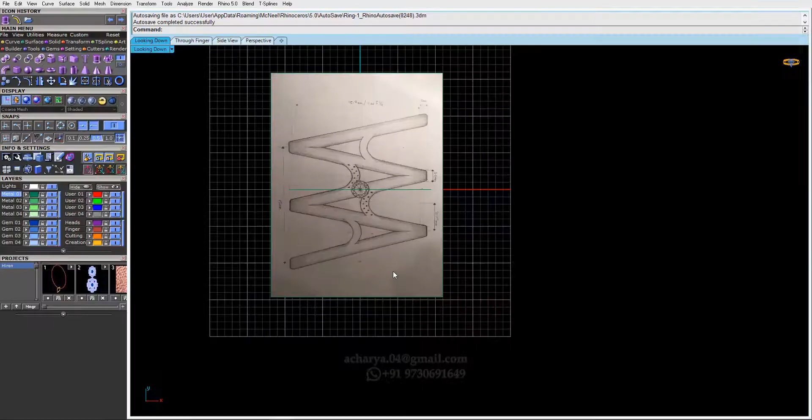Thank you, cheers. So today we're gonna make this ring. A client of mine sent me this image, and basically it's a ring, and he's given the information here, the size and the dimension. There are a few things which are not technically correct, so I informed him and he said, okay Arun, you can do it however you feel is good. So let's start this.

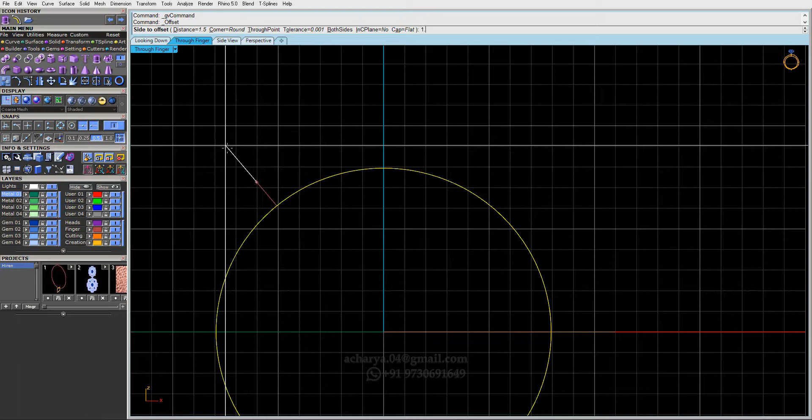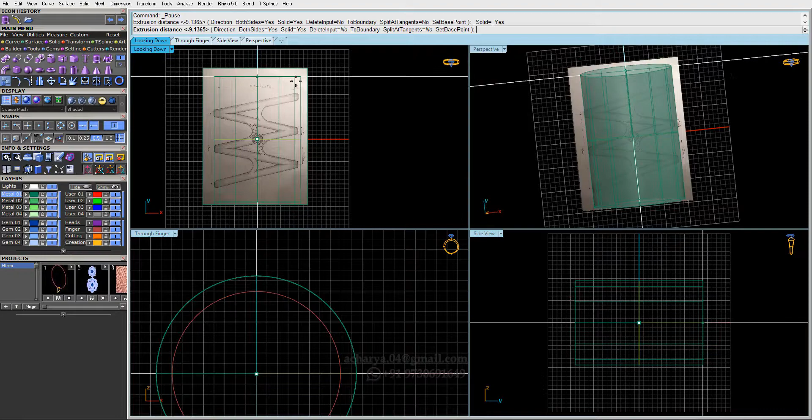I've taken the ring size here, and I'll do an offset. I'll make it around 1.5, just to make sure it's not too bulky, not too heavy. Before I extrude, I'll rebuild this curve, 12 by 3, that's a good amount. Then extrude. I'm just making it larger than the design right now, there's no dimension yet, and later we'll trace it down and see how we can fix this up.

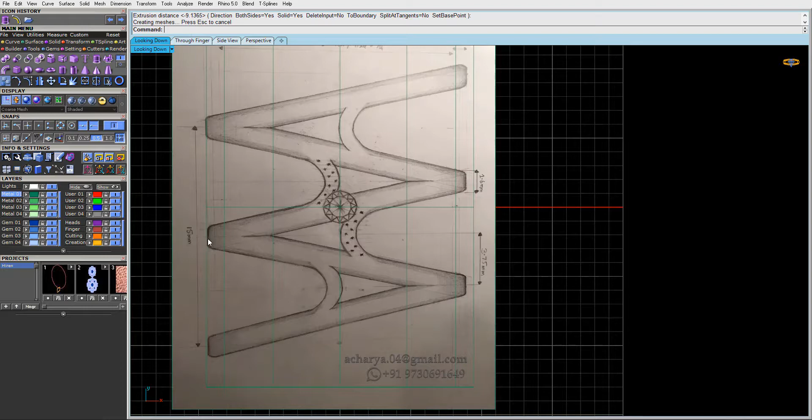So here the thickness is around 1.6, and from one end to the other end it's around 3.75 millimeters, as you can see here. And from the middle of this ring to the middle of this ring, it's around 15 millimeters.

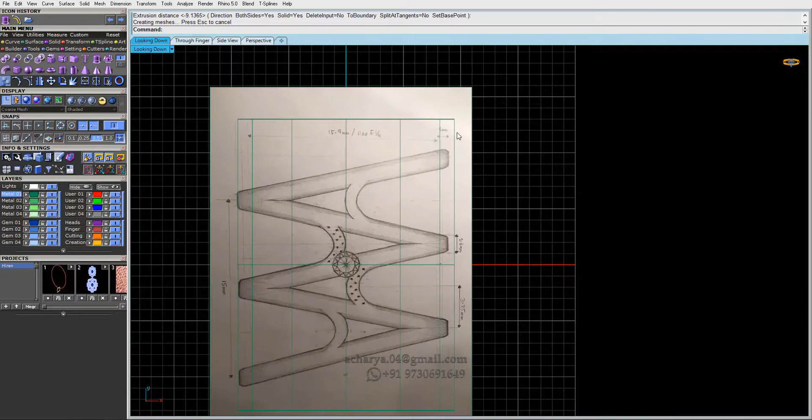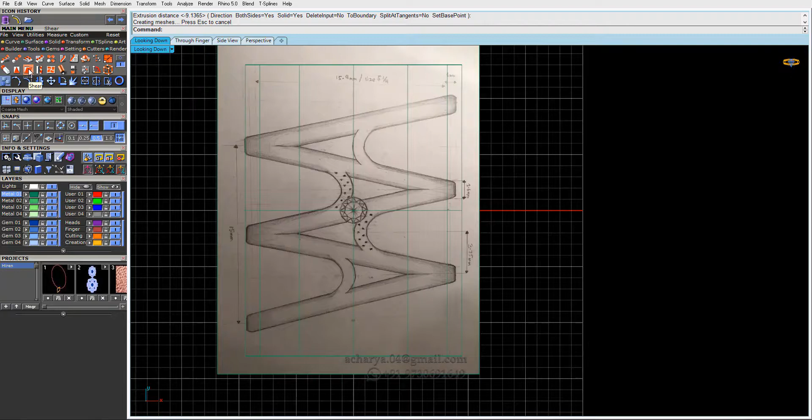So if you have something like this, it's actually very easy. We can just make one ring and then use the shear command, which is over here. Sometimes I have to look for the command. Here it is, shear, and you can shear this ring downside, then mirror it on the other side. I'll show you the easiest way, and then I'll show you the other way.

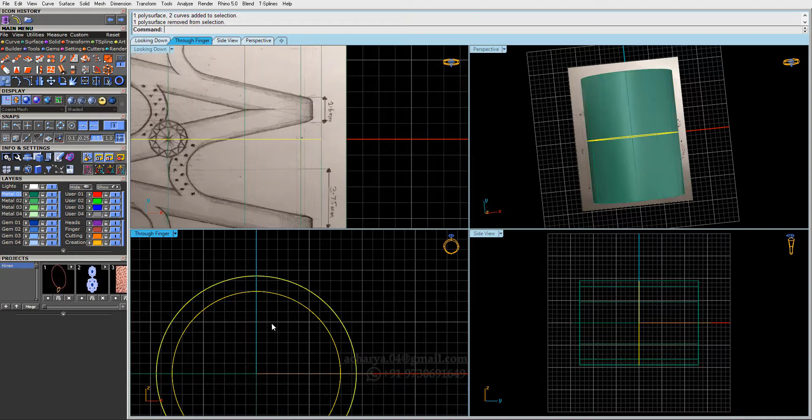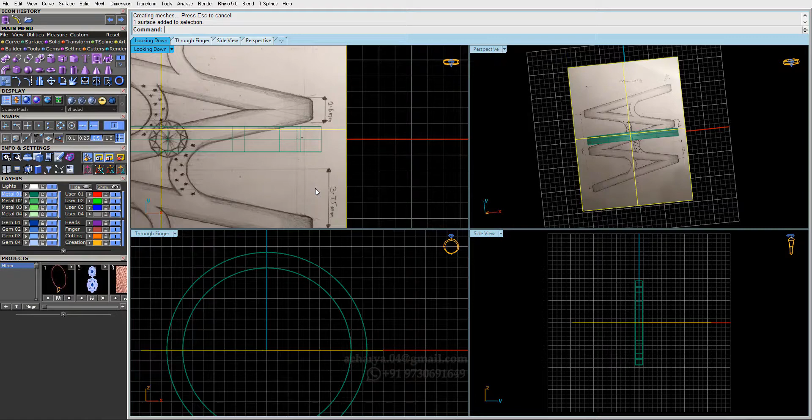It says 1.6, so what I'll do here is, okay, I just deleted the poly surface, I don't need them because I changed my mind. I'm gonna do it another way. I'm doing an extrude here, 1.6 divided by 2, and the reason I did this by 2 is because the extrusion was on both sides. I use half the value, and I'm gonna lock this surface.

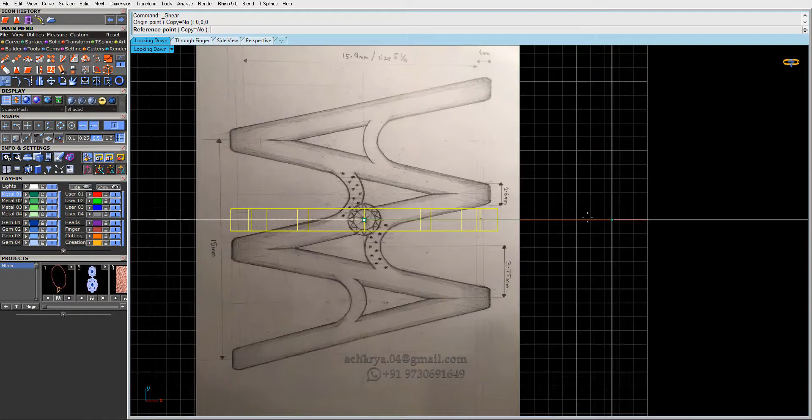If you guys don't know how I got this design on my screen, you have to follow my day 1 tutorial. So lock this out, Control L to lock it, and okay, this is the poly surface, let's go into shear. Select this out, this is the one. F4, use the ortho, press shift, and there you go. This is the first shank.

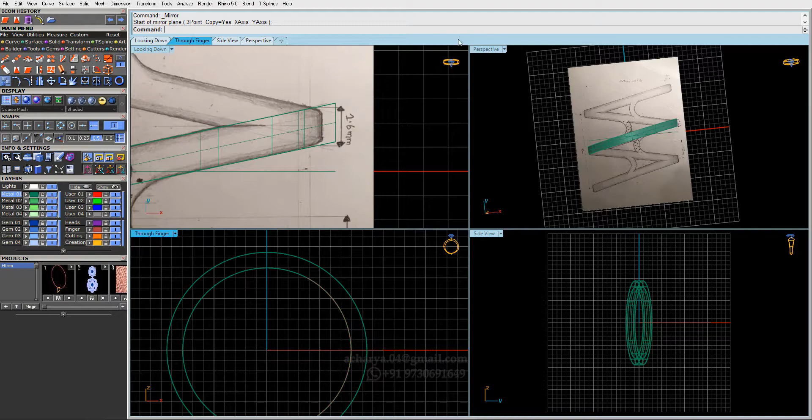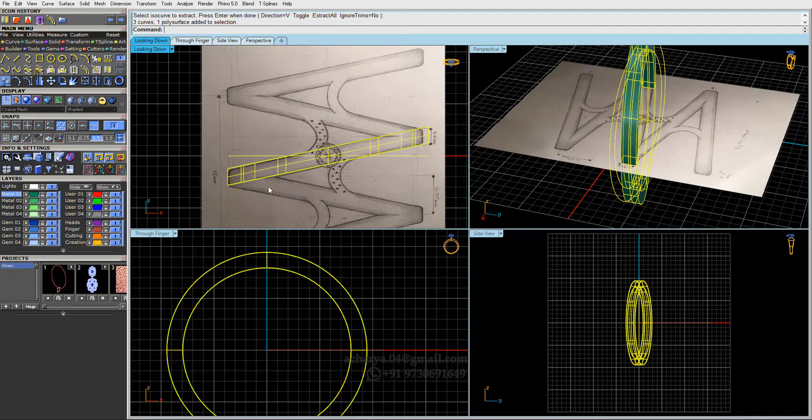On the other side I'm going to use the mirror, and for that I need something to hold, which I don't have right now. So I can extract a curve here, extract a curve, and that should be quad and toggle. Here it is. Now I have a curve, and I can hold down to the mid and just mirror this on the other side. So mirror, here's my mid, switch it on and everything goes off, and that's it.

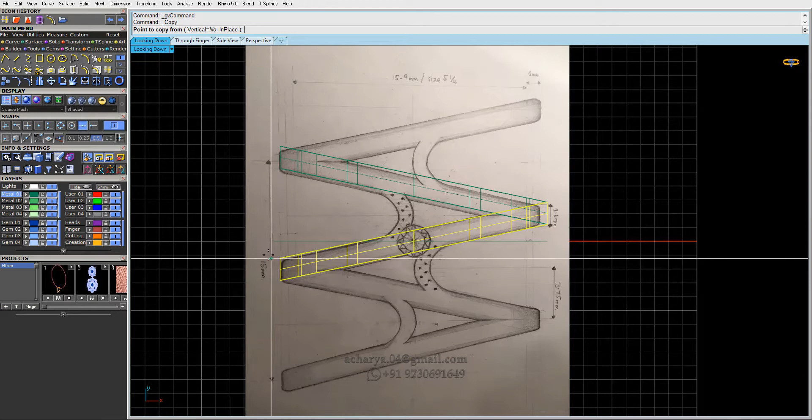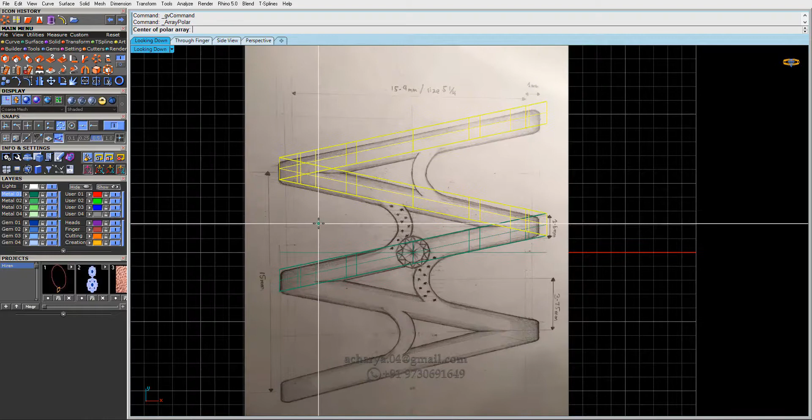I'll do the same for this one to be on the other side, or you can just use the copy option. You'll use the quad, and from here I'll copy, but make sure the project is on. And that's it, this ring was so easy. Now I'm gonna do an array polar on the other side, so F4, number of copies is 2. That's it. So the only thing remaining right now is this design, this metal over here.

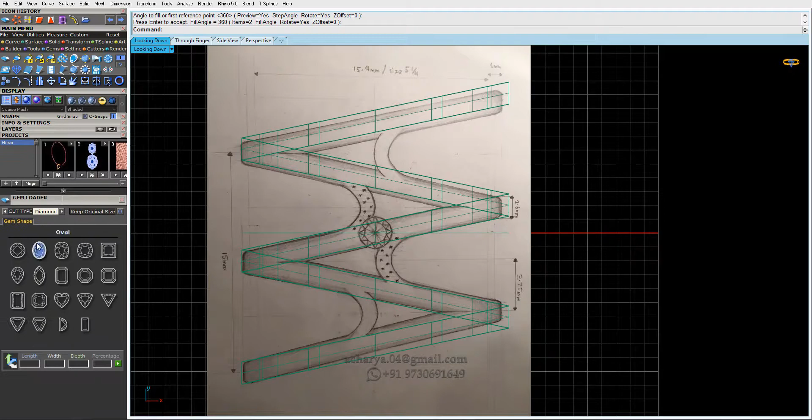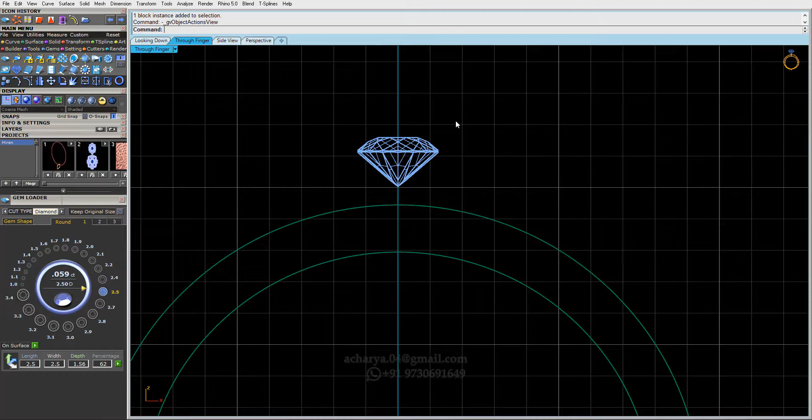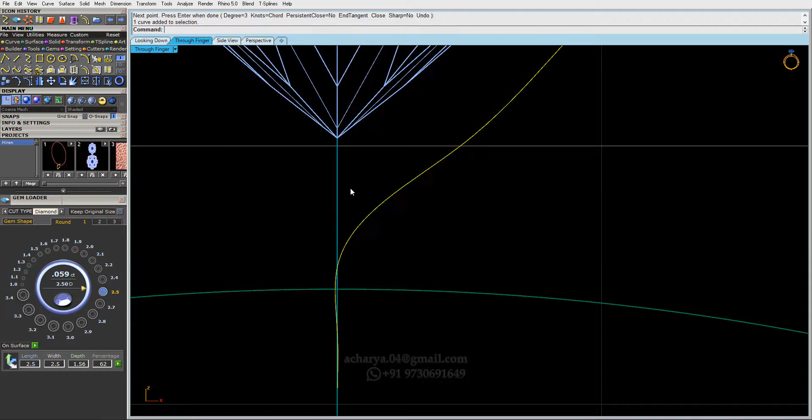Okay, and then we can see which diamond is sitting over here. Let's say I don't have any diamond information, so let's see what suits best here. 2.5 looks good to me, and I'll just raise it up. You can do a head builder here, or I prefer, for this tiny stone, I would just make it by curve, so just draw a curve with curve interpolate, and undo, and it goes down. Let's fix this. Usually you should have a library of all these small things, so you don't really have to work on it each time.

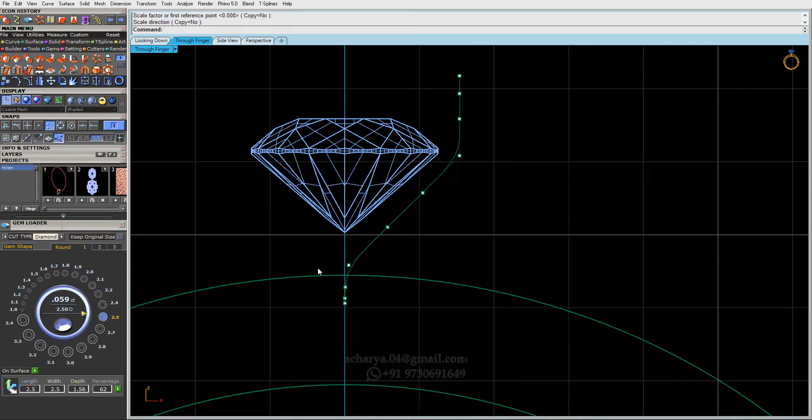Switch on the near option and use the ortho here, and I'll do 0.0001 just to make it flat. I'll do the same thing here and the same thing here as well. So what I've done here, as you can see, they are going straight now.

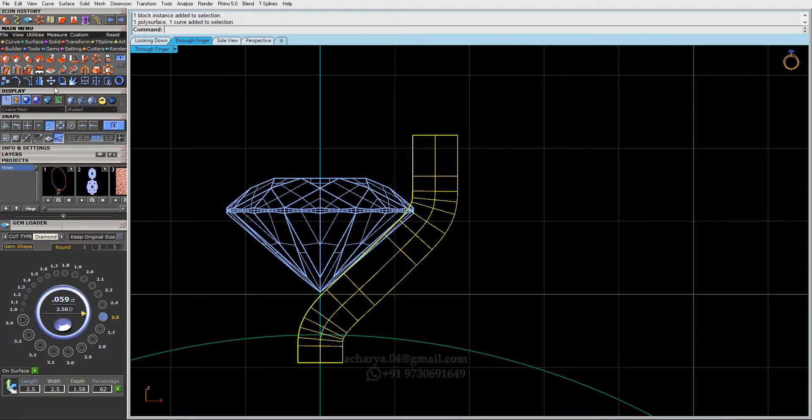Like from here it's straight, and then it goes straight here and straight over here. All right, so pipe command, make it around 0.6, that looks good, and just bring it down a little bit, yes. And I'll do an array polar here. That's it, it's ready.

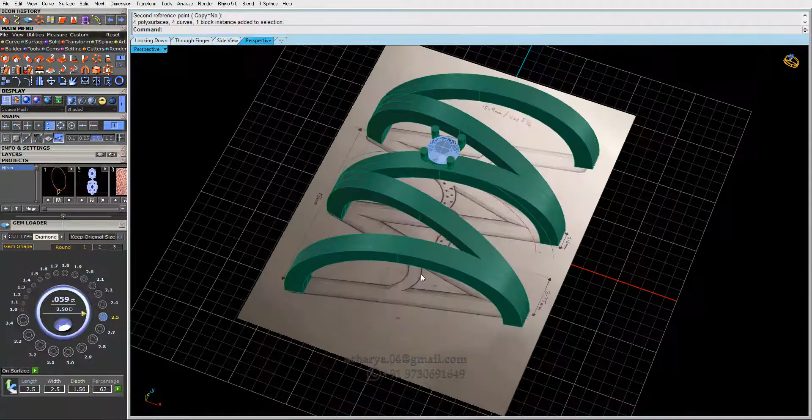And yep. And what else, yes, this one, still have to do this. So now what I'm gonna do is I'm gonna use the curve and extrude this, and here I'll just draw this line, this one over here.

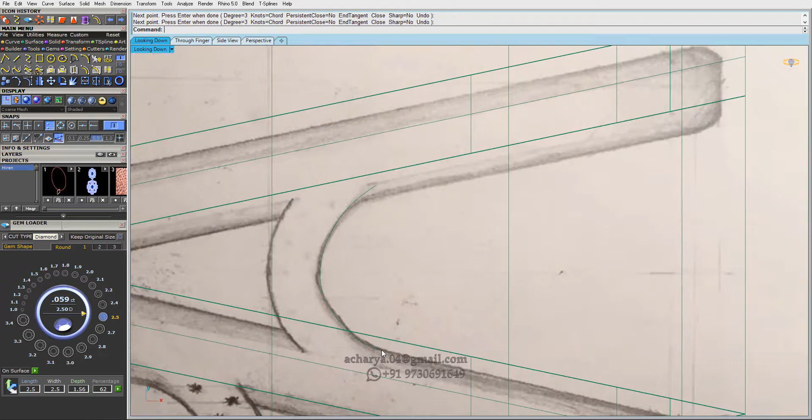As you can see, this is not matching to the design, but obviously we have to be sure that we are doing it in the right way. So the thing I realized, I didn't measure this shank, from here to here. So let's do this now.

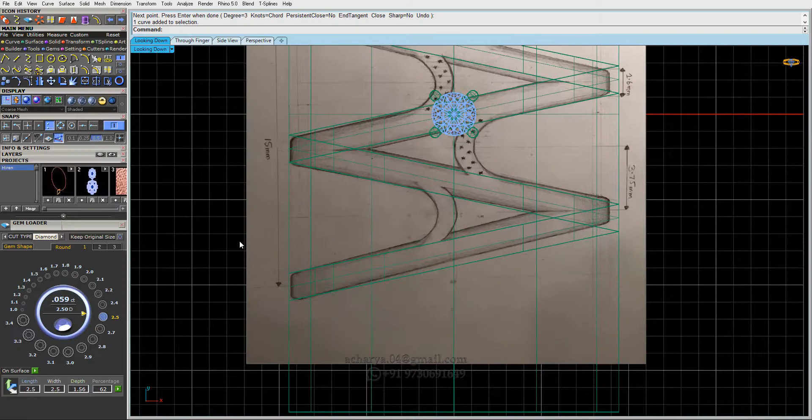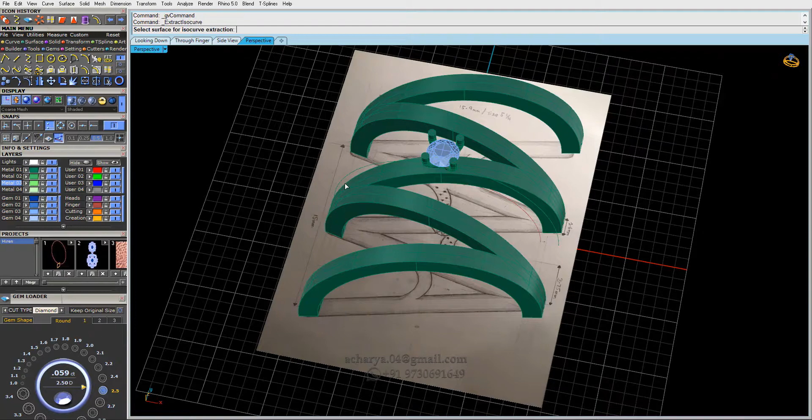So for that I need to extract the curve for the middle line, but before it gets complicated, I'll hide this, and let's change the layer color over here. So interpolate, click, extract iso curve, click, toggle, intersection on.

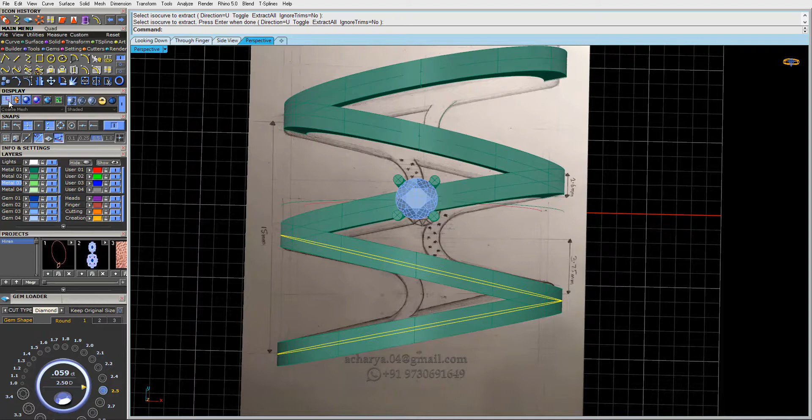I'll use on this, and I'll do the same for this. Okay, same, looks good. And then I can copy this on the other side. So quad is on, and let's copy this. Okay, so we have a curve exactly in the middle, and let's measure this.

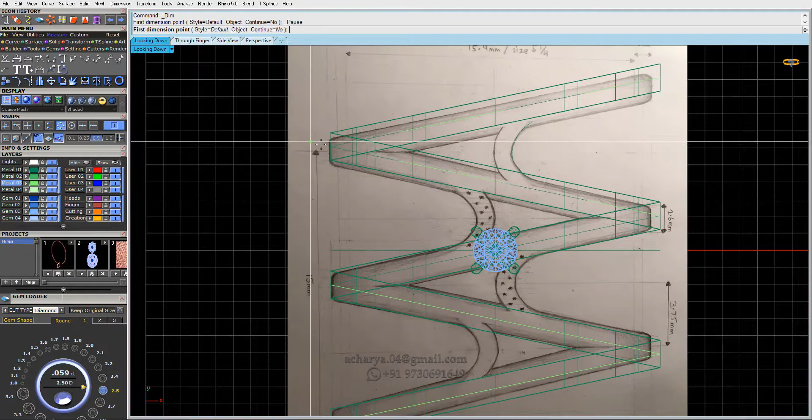So from the mid of this quad over here. Okay, where is it? Hello. All right, I don't know why there's no point here. I should be able to get one. Yeah, there is one. Lock it.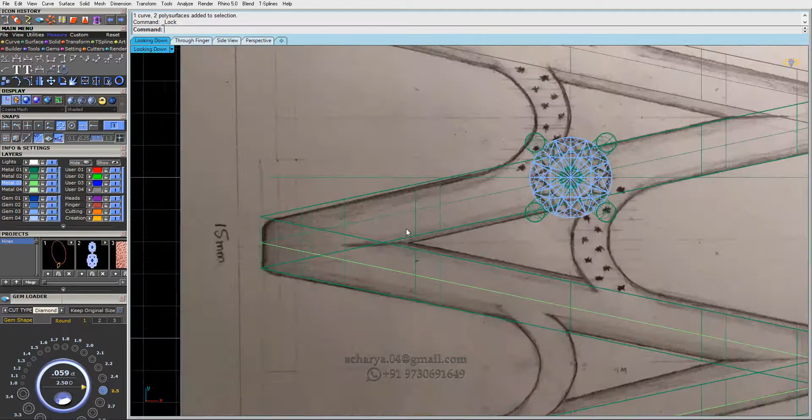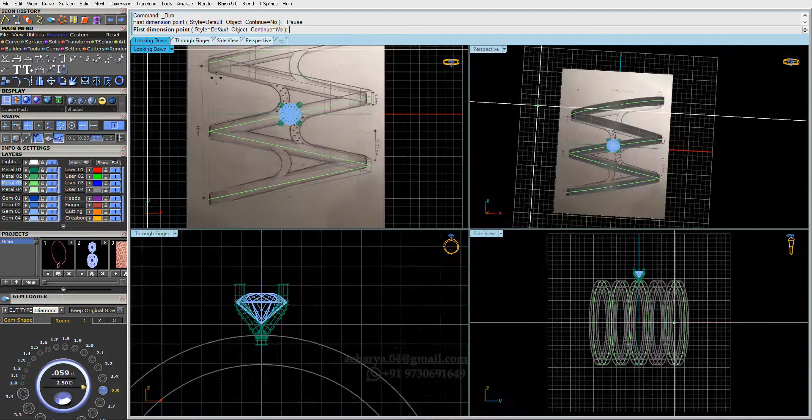Lock this as well. And yep, let's measure this again. Okay, so there's nothing coming out. Let's try with Intersect. I don't know why it happens like this.

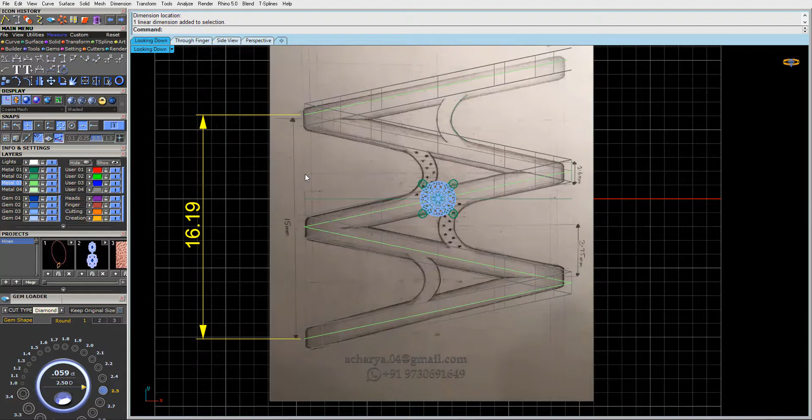It's too bad. Yeah, here, quad to quad. Okay, so it's bigger than what we should have done it. So how do we get this right?

Okay, well, technically speaking, if this is 15 millimeter and you divide this in half, so it should be if you divide 15 by half is 7.5, and if you divide 7.5 by 2, how much it should be? Something around 3. Oh yeah, that's what written over here.

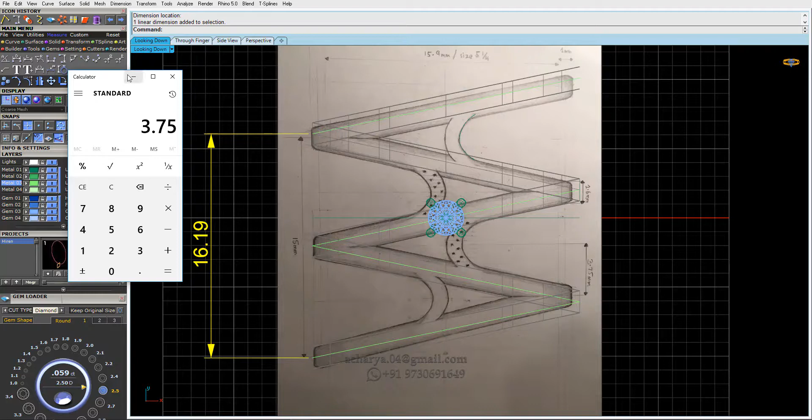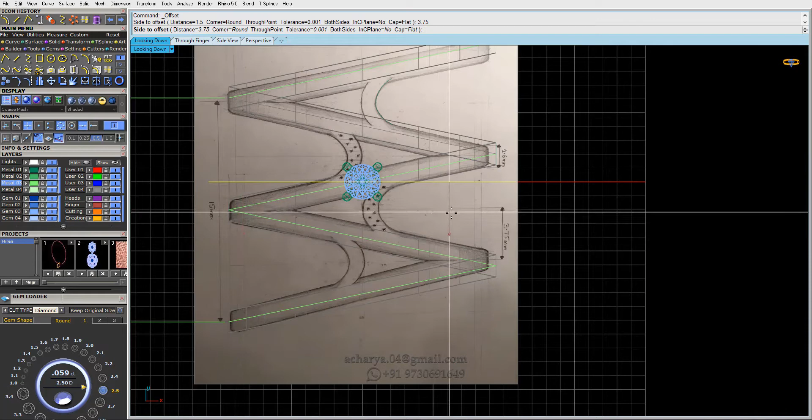So all right, so what we'll do here is I'll draw a line from the center, both sides, and I'll make an offset on the other side, 3.75, which should come all right anywhere. So just click here. So this is the length we are looking for.

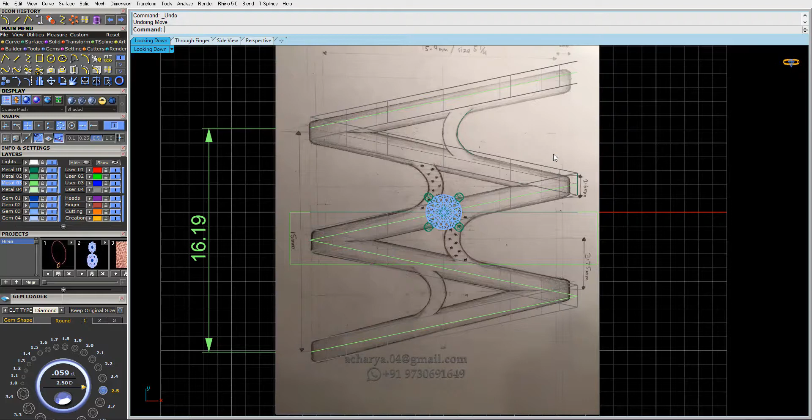So what I will do, I will move this from here. Okay, I'll keep this in the same position, and okay, and what I will do here is I will just make it double. All right. Yep.

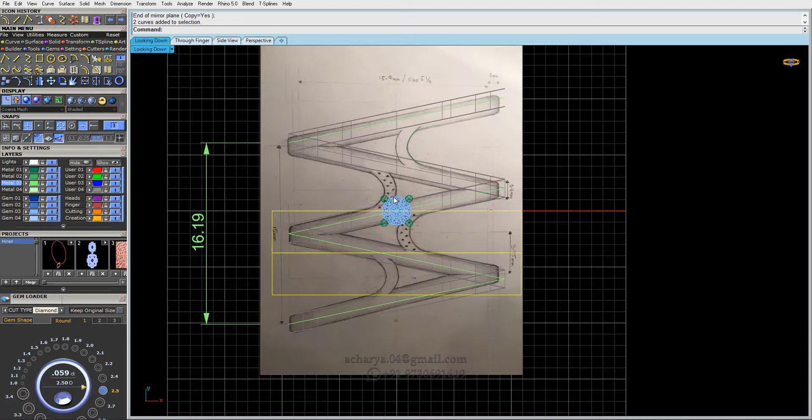So the middle of this is here, and this is where it should have ended. Okay, this curve over here. So we did everything good, but it was just that because of the offset here, because they had 1 millimeter, and that's why it's showing up here instead of here. So not a big deal.

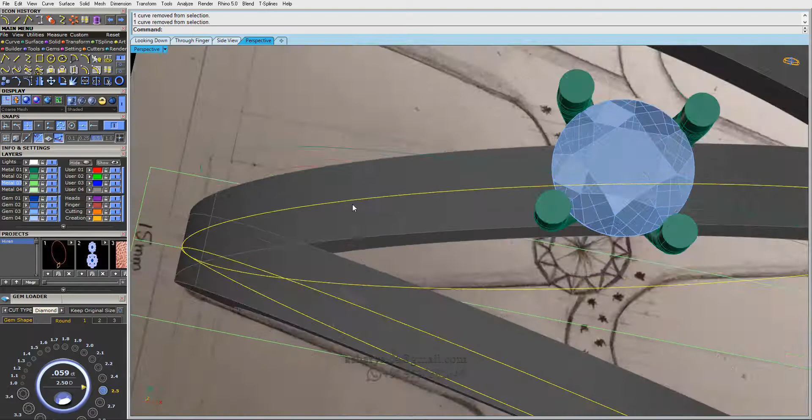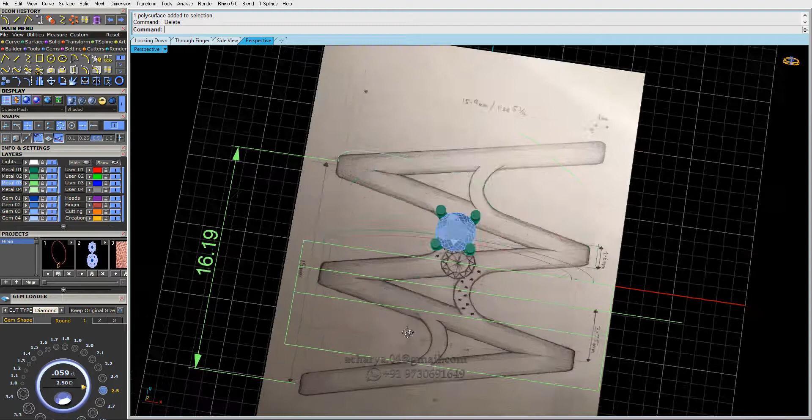What we can do here is, okay, I can do this completely new without losing my diamonds. All right, so delete this. Yes, are you sure, Arun? Yes, delete this. Okay, unlock everything, and delete. This is so simple, I should not make it complicated.

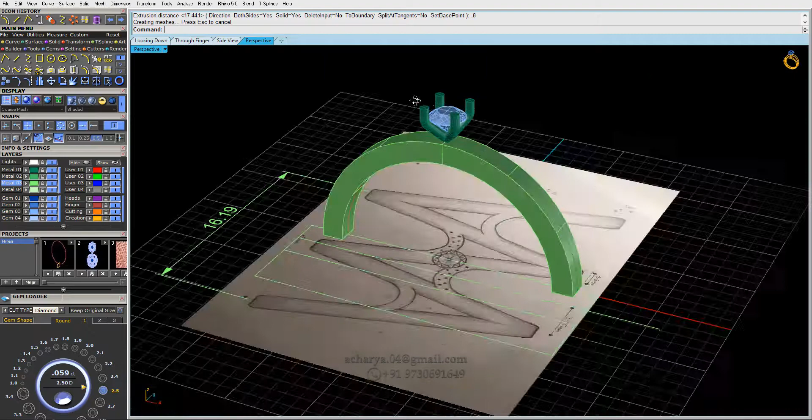All right, so extrude again. Extrusion was 1.6, so it's 0.8 if it's on both sides. 0.8, and we'll select the poly surface and the outside curve, which is this one. Okay, and this time we're gonna use the shear option.

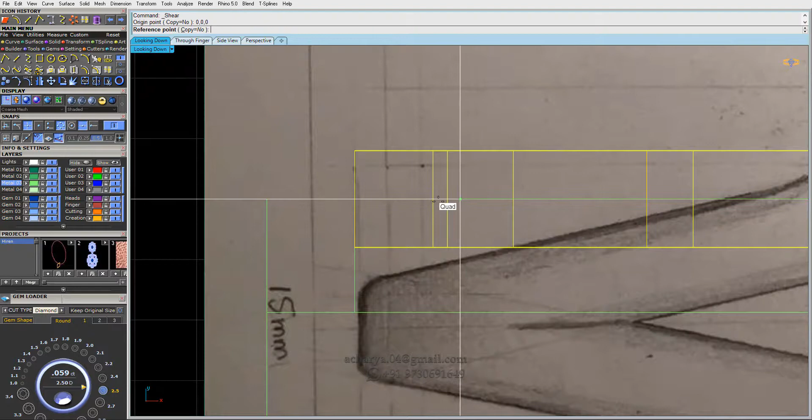Okay, yes, I got you this time. Click here on the quad and then move it to the mid. Okay, all right, so this is the mid here, but this has to be on the curve. So just draw a curve from quad to intersect, and then when you do a shear from F4, make sure the project is on the intersection and intersection.

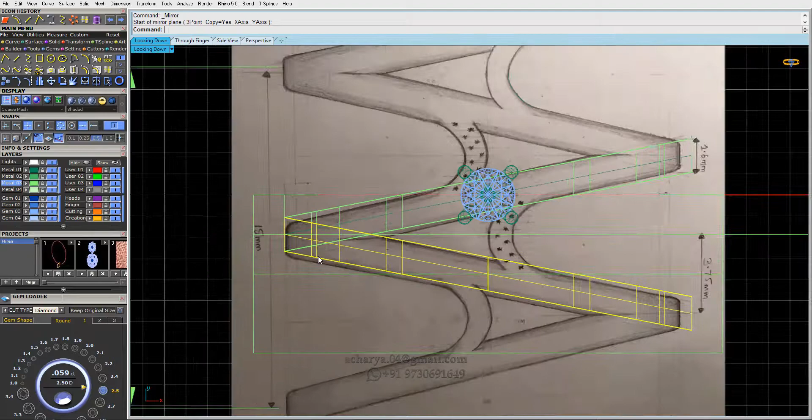That's it. Perfect. Mirror on the other side. This is another way, like you can still use this option as well. And mirror on the other side using the quad. Hello quad. Okay, it's not working. I don't know why. It should work, but sometimes it doesn't, so it's fine.

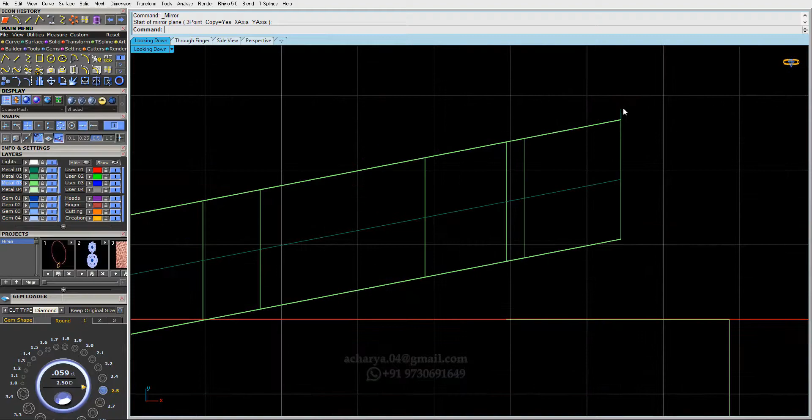Maybe it could be the reason that I have a surface over here, so I just hide it, and I'll try to mirror it again. You need to know the answer. Why is it not working? Okay, it's still not working. That's fine. And I don't know what it is.

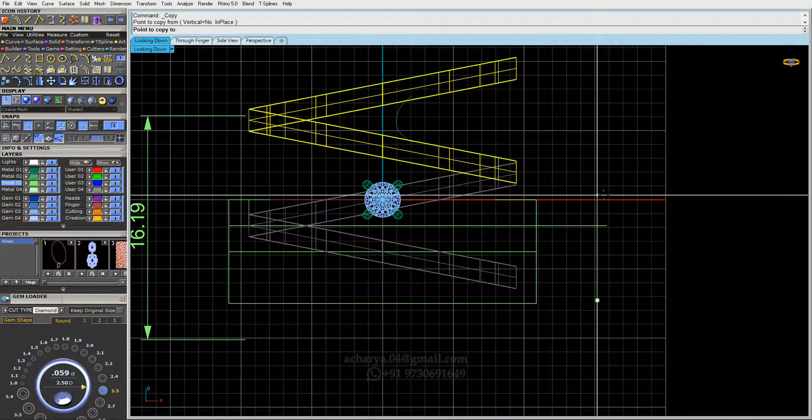Select this. Oh, what happened? Okay. Delete this. Select this as well. And let's do mirror, mirror, mirror. Oh god, they're not helping me. That's so bad. But because we have the number, let's do copy 15 millimeter.

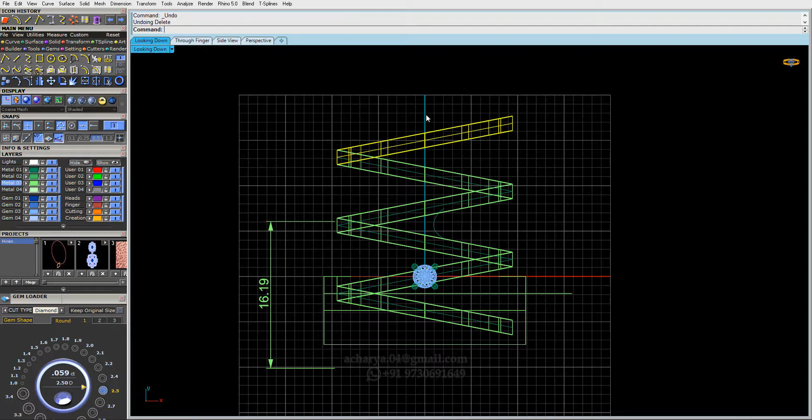And whoa, whoa, whoa. 7.5. Yes, it's helping. That's good. And 15. Perfect. So any one of this would be extra, because I don't have my image. So let's bring it back. Okay, this has to be here, so let's delete these two. We don't need them. And one has to be over here, and that I can do array polar.

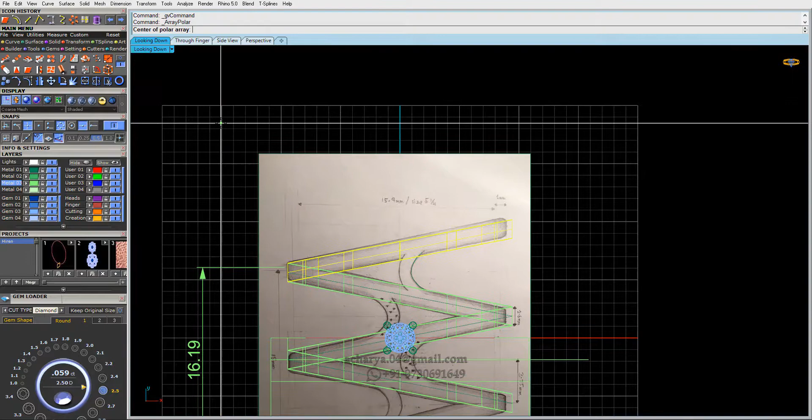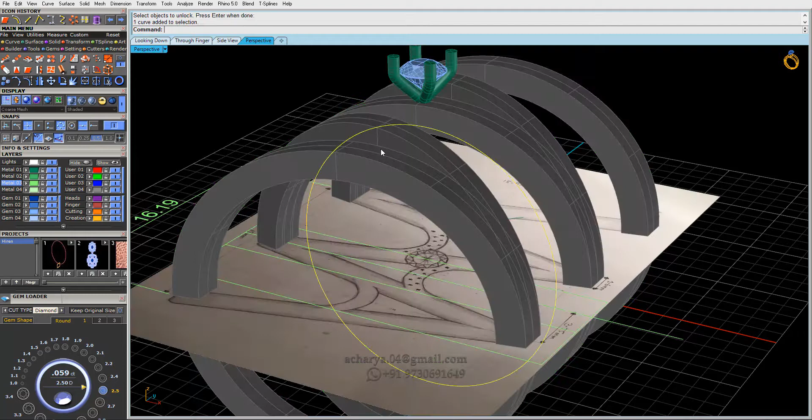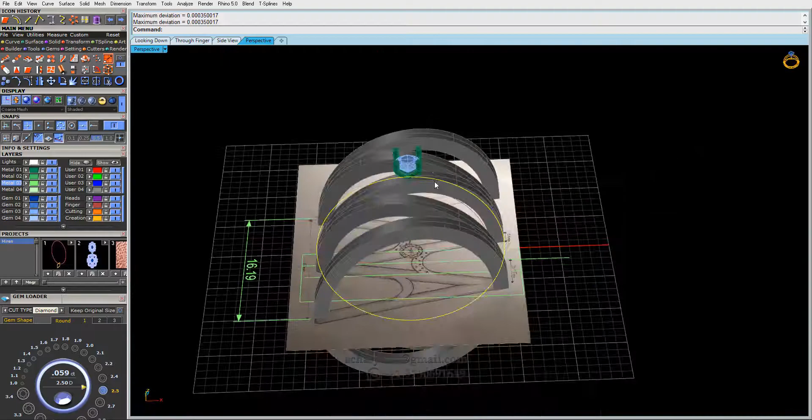Okay, that's it. So everything is good here, let's just lock everything else and unlock your ring rail, and you can offset it again 1.5. I'm doing this because I remember I just did the shear on my outside ring rail as well, so that's fine, you can have it anytime. Just try to rebuild. Maybe I didn't do the rebuild earlier - maybe that's one reason it's not helping me find the quad sometimes.

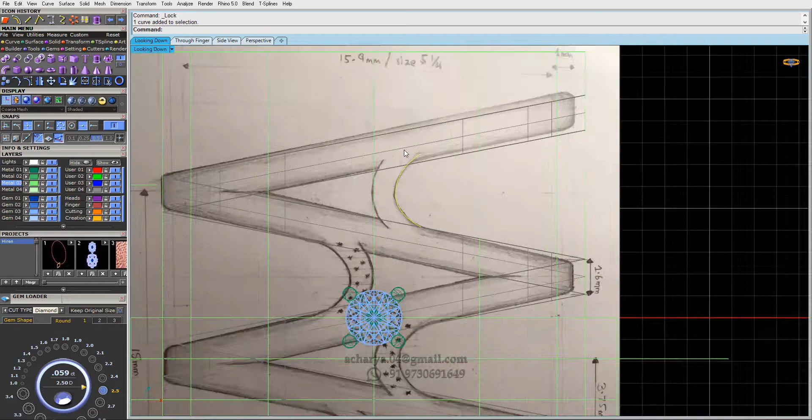Okay, so extrude, solid option no - the reason why I did no, I'll explain now why. Lock it. Okay, this time I got it right almost. You can see my design matches the 3D model, so that's a good sign. Offset 1.5, or 1.2, or 1 millimeter - yeah, 1 millimeter looks good.

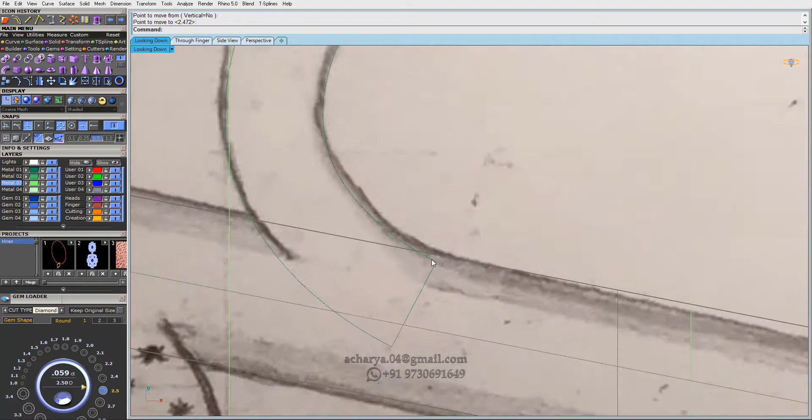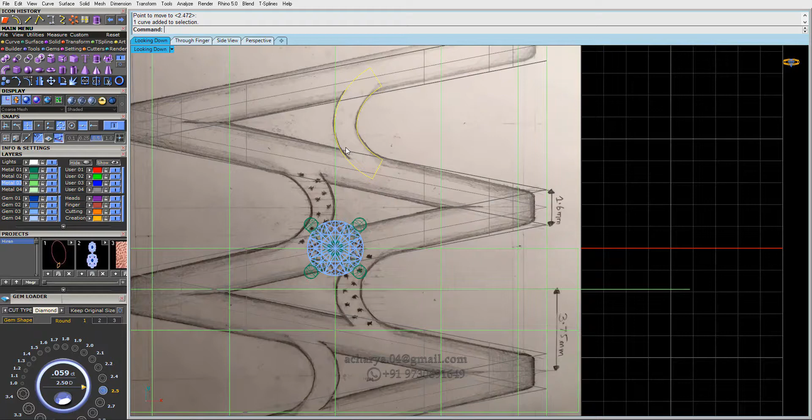Just move it a bit, because here I saw it's not that good. Sometimes we zoom it 100 times, and then still feel like this thing over here isn't good or something. You feel like it's not good, but in reality, when you have the piece ready, you're never going to see that difference. You just have to be careful - sometimes you look at it, but not so deep inside. You don't have to zoom that much to dig out something.

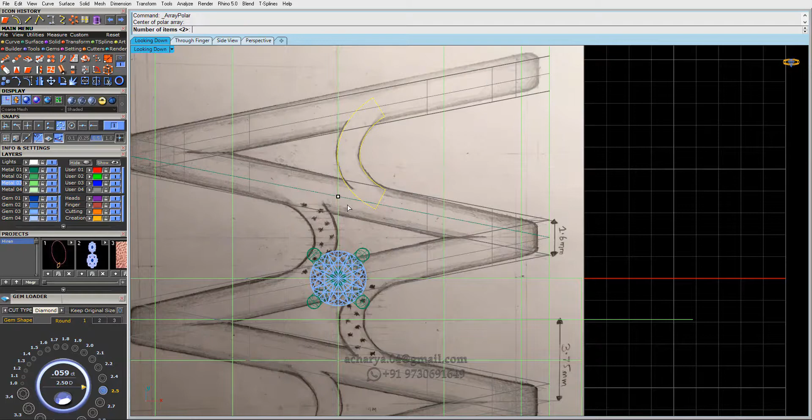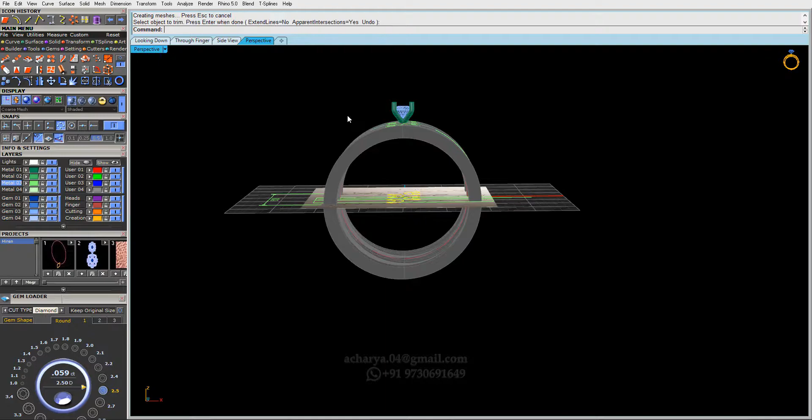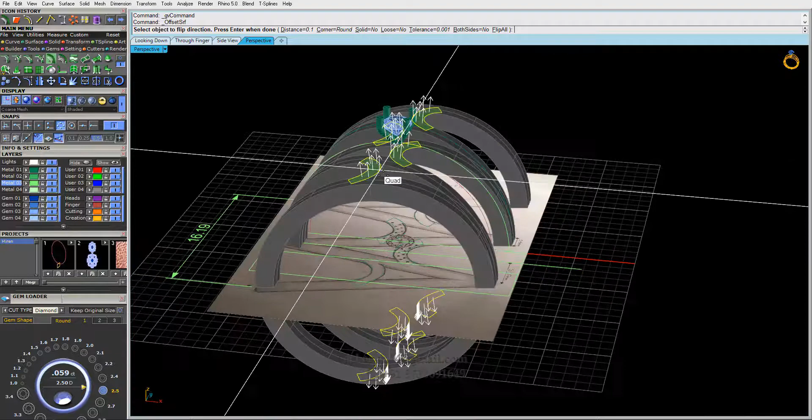Deselect this and just do a trim. That's it - you'll have down and up. We need only the upper one, so let's delete this - or maybe they need it down as well. I don't know, because I don't have any other picture. So I'll keep this as well, select both of them, going surface, and I'll do an offset surface. So solid option, flip the side. I'm using a shortcut key here, F and spacebar, and we'll give the same thickness, that's 1.5. That's it, we are done with this ring.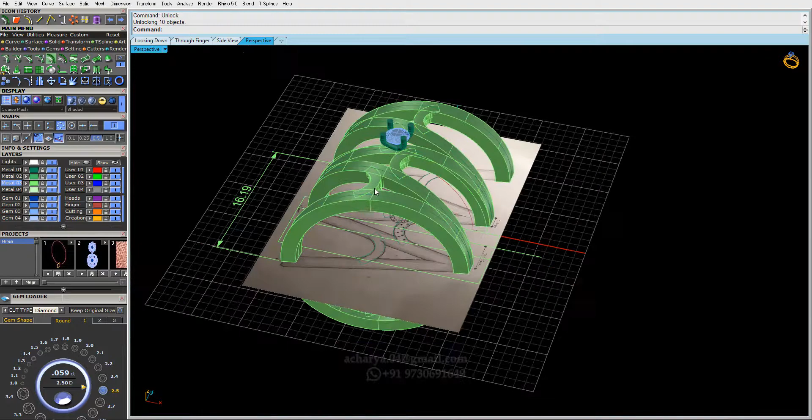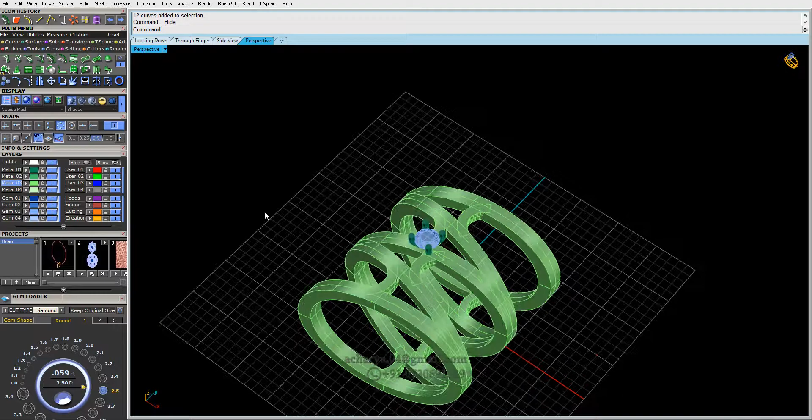So just unlock everything, let's hide this out, hide this as well, select curve. Well, I have a habit of typing on the keyboard rather than finding over here, so if you guys don't know what I'm typing, just follow the letters here on the command bar.

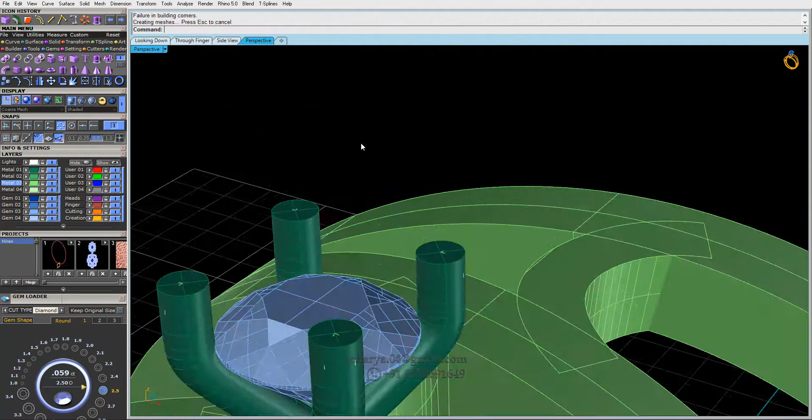All right, looks good. Finally we'll do a fillet, a smaller fillet. Select all, and let's do this 0.3. Well, let's do 0.25. Sorry, select all, 0.25, enter. Perfect.

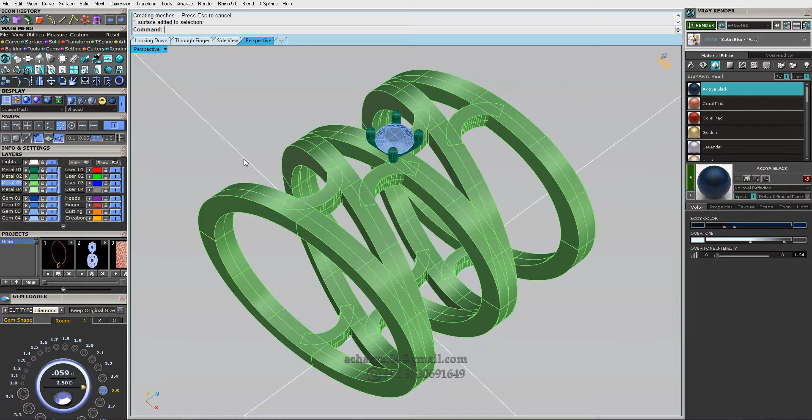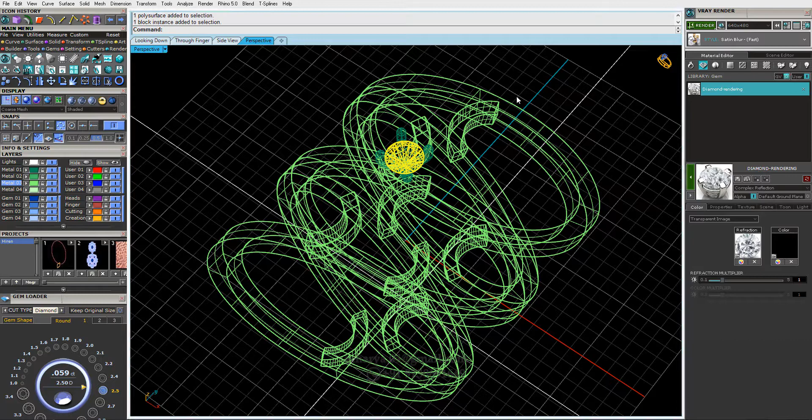Okay, so let's do the rendering. Ground plane, oops, this one, and wireframe. Right click, right click - these are my objects here, so it's much easier to select. White gold, and I'll use this option. I have my special diamond here. Okay, select this and a special background as well. Select view, zoom selected, so it's exactly in the center, then move your mouse to the center of your axis and just zoom out once.

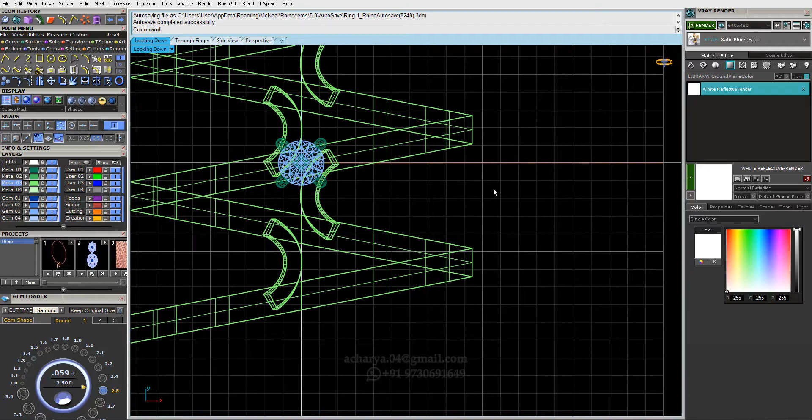Render. There you go - that's the first look. Okay, I see the body surfaces are intersecting each other, and that's why you have this - if you have a double surface, you'll see something like this. No problem, we can fix this. I might need to trim the surface and join them together. This is only for the rendering - otherwise you can just fix this out in Magics software, export them, and do a union.

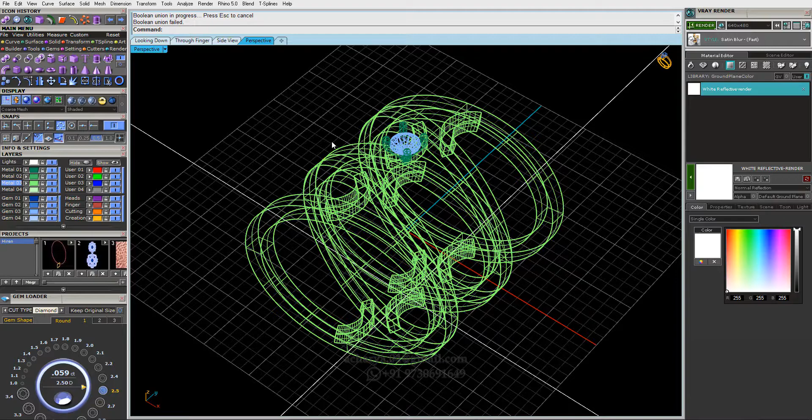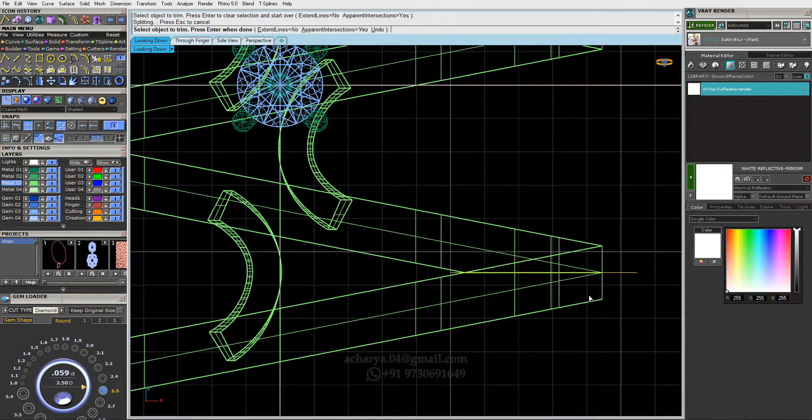So what I'll do here is try to union everything else. Just try this - it doesn't work, but just try. It failed, as I said. Okay, no problem, take some time. I want you guys to see what you really have to do if you come to such a situation. Trim this out, trim this out, and yep, I'll do the same.

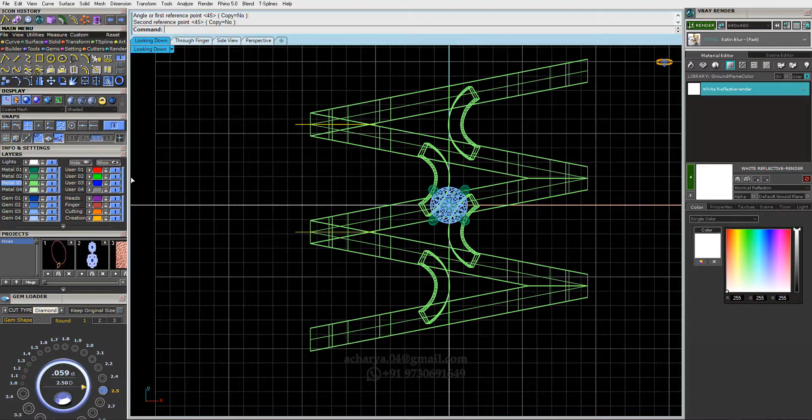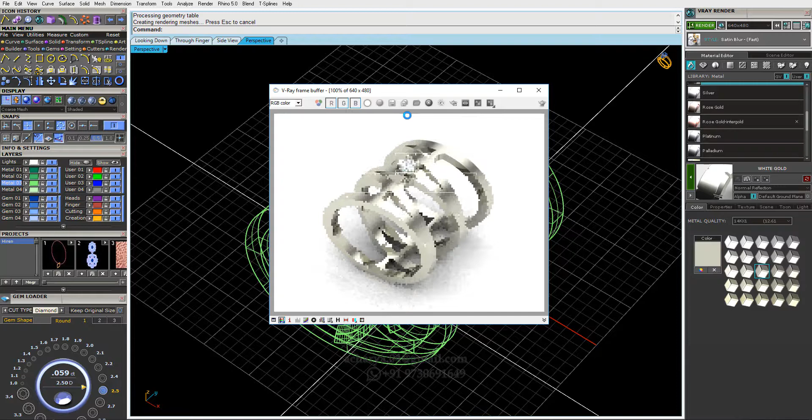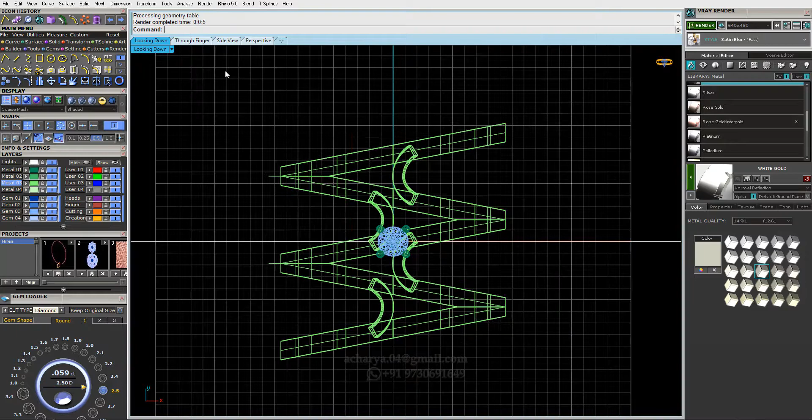All right, select this, and oops, okay, yeah it's good. GV, white gold, select, render. Dun dun dun, it's done - Magic. All right, save this. Right click.